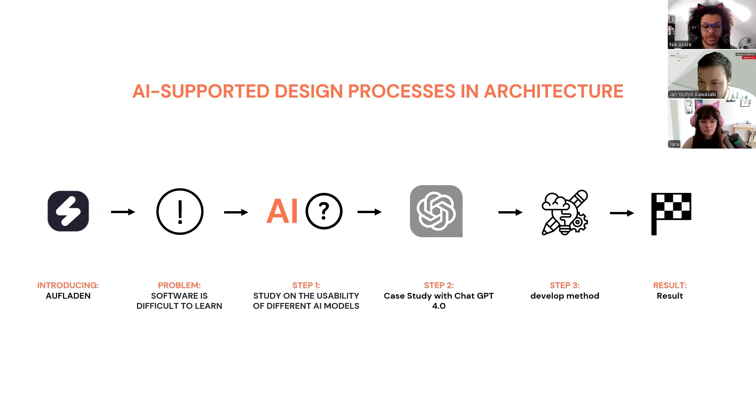In the research project Aufladen, which is funded by the Stiftung Innovation in der Hochschullehre, we are developing a digital teaching portal together with around 20 students. Aufladen is the knowledge-filling station where students have the opportunity to test and expand their knowledge in the context of digital transformation with so-called knowledge nuggets, through practical, playful application in the form of learning videos, tasks, click tutorials, and quizzes.

The research project offers space for various labs in which teachers can explore topics together with students through research-based learning and teaching. Aufladen offers labs on topics such as AI and the design process, parametric design, and AR technology. The lab areas of parametric design and AR technology are important for us today.

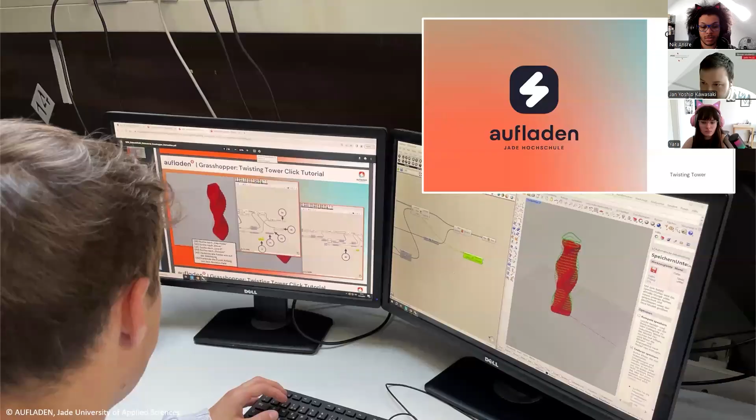Based on our research project, we have been able to create a course program where students have the opportunity to investigate building in combination with augmented reality and the feasibility behind it. Before the construction process, the object in question must be designed and modeled. The designs were parametric structures.

In the parametric design lab, it turned out that we were able to achieve the greatest learning success through prepared click tutorials. Nevertheless, a major problem emerged: the operation of the software is so complicated for beginners that they are severely restricted and cannot implement their ideas in the software. To create the designs geometrically, we use Rhino in conjunction with Grasshopper to then transfer the geometry to the AR glasses via the Fologram software.

Grasshopper is a visual programming interface and offers great possibilities for complex designs, but is associated with a steep learning curve. Students from our departments generally have no programming experience and often have no points of contact, and therefore little understanding of programming.

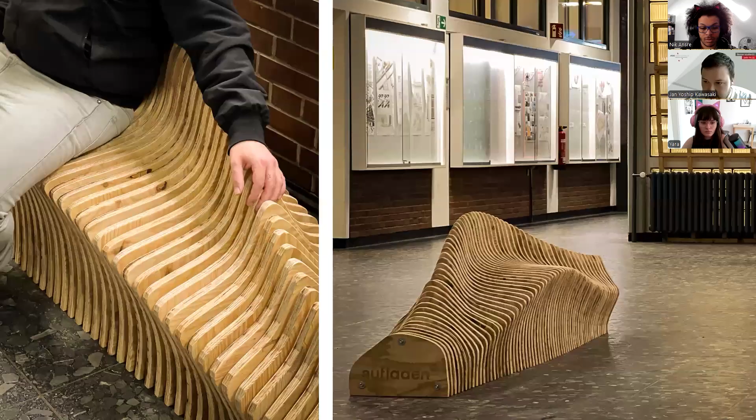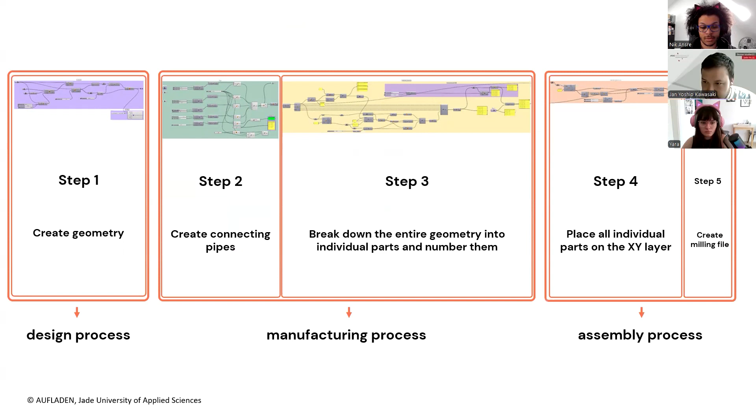Here we see a project from the last semester that we designed, planned, and built together with students. The bench is not overly complicated, but the code behind it is. This entire script is necessary for this rather simple bench. We cover different areas such as the design process, the manufacturing process, and the assembly process.

Due to the complexity of the software, we came up with the idea of whether we could let the AI take on the methodical knowledge about the software and include this step in our working process.

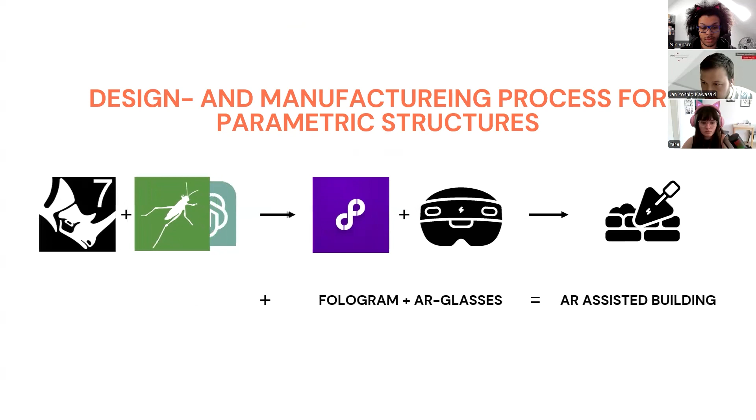Now we had to find a suitable AI for our approach. The main consideration was the workflow that the AI must be able to handle. Grasshopper offers the option of generating geometry via Python code. For us, this means that the AI must be able to translate our prompts into Python code. We can then easily read the output code into Grasshopper and check its function.

If the code is faulty or does not achieve the desired result, we can return the error message to the AI, and it can improve the code based on this. We can repeat this iterative process until the desired result is achieved.

We've developed an evaluation matrix to evaluate the various AI models. The requirements are divided into several points; we mentioned the three most important: Is the AI accessible in Germany? Can the AI understand and generate Python code? And can the AI use images to create shapes in Rhino with Python code?

We tested ChatGPT 3.5, ChatGPT 4, the Edge Copilot, as well as Gemini and Claude 3. ChatGPT 4 proved to be the most useful for application. The AI is slightly more powerful than the Edge Copilot and is not limited to 30 queries, allowing for the development of much more complex shapes over the course of a conversation. With unrestricted availability in Germany and the ability to understand and generate Python code, ChatGPT 4 proved to be the most useful for application. Additionally, it can use Grasshopper Python code to create geometric shapes and describe complex geometric forms.

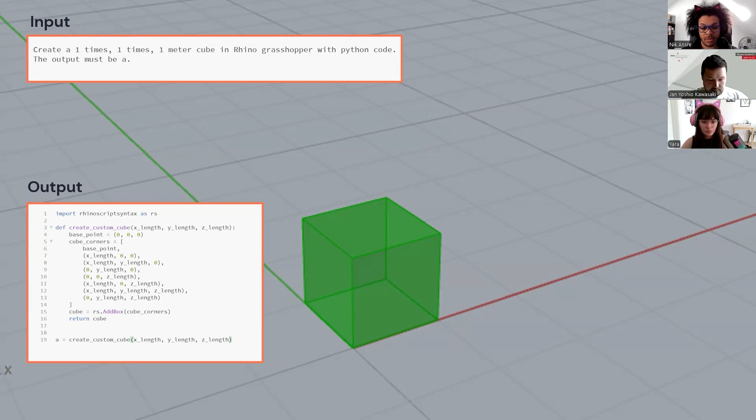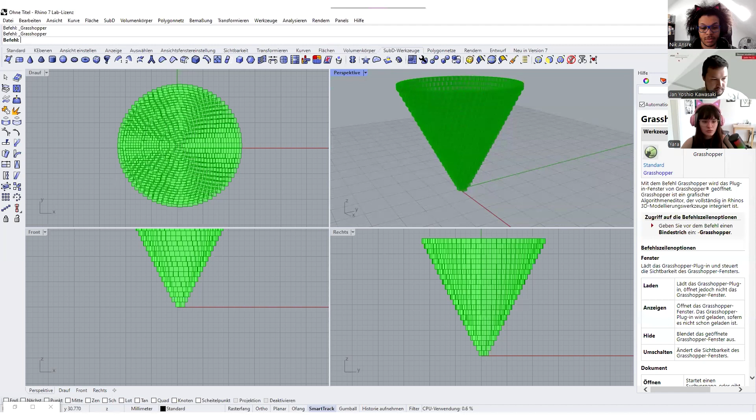A failure in generating more complex geometry with ChatGPT 4 occurred when it didn't quite understand how to build a vase. We then learned from these failures how to better define shapes.

After further discussions with ChatGPT, we could convey our idea of a vase, resulting in a better and more promising outcome on which we could build.

We then tried to generate a vase without a prior discussion. Without clear dimensions, this attempt was unsuccessful.

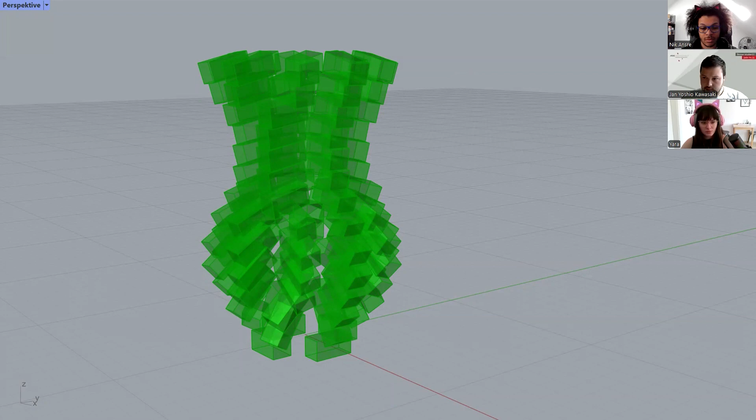In the process, we developed a method that ensures the AI produces consistent and reproducible results. We developed this method after failing to create a vase, opting for a simpler approach: the block structure.

Each of the two adjacent X's consists of a block, making it easier for the eye to recognize and for ChatGPT's image recognition to identify.

The method uses the X approach to eventually enable a reconstruction. The image shows a 2D view of a vase, and ChatGPT should generate the Python code based on the overall height, block dimensions, and respective width of the levels.

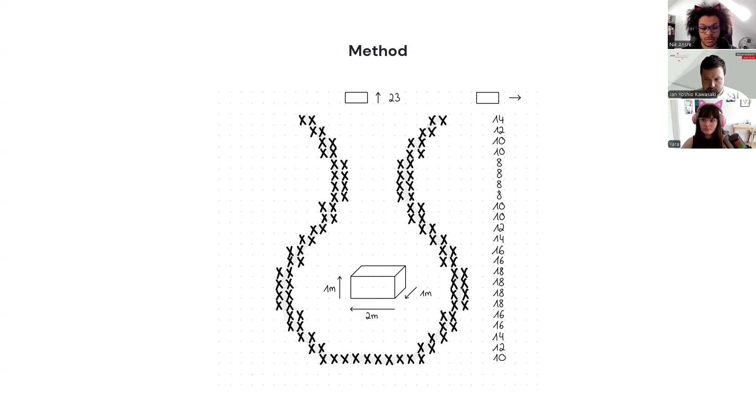This video shows the process of generating with ChatGPT 4. First, we provide the AI with a description of the vase with the appropriate dimensions. It then generates the corresponding code.

Due to the complexity of the request, it needs to refine and ensure the output is defined as A, which is standard naming in the GH Python scripting module in Grasshopper.

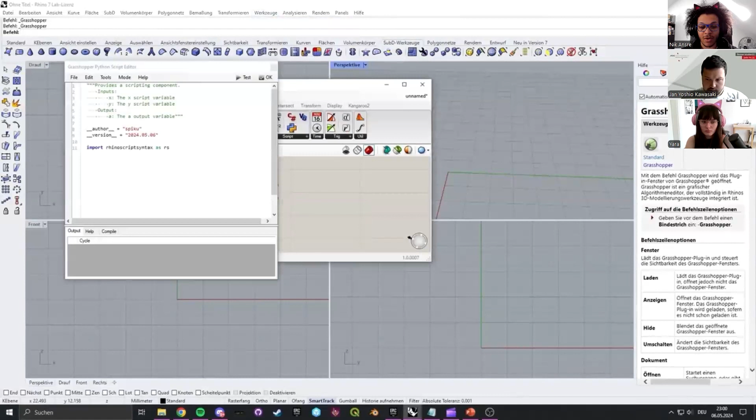Then Grasshopper is opened and the GH Python script module is inserted to input and test the code, with the results displayed in Rhino. Next, the Z variable is added as an input in the module.

The number sliders are connected to the three variables X, Y, and Z. The AI is instructed to adjust the code so the input variables can be modified via the sliders.

Again, the output needs to be redefined as A. Now the new input is the code in the Python module. The sliders can now be adjusted as the base shown in the video.

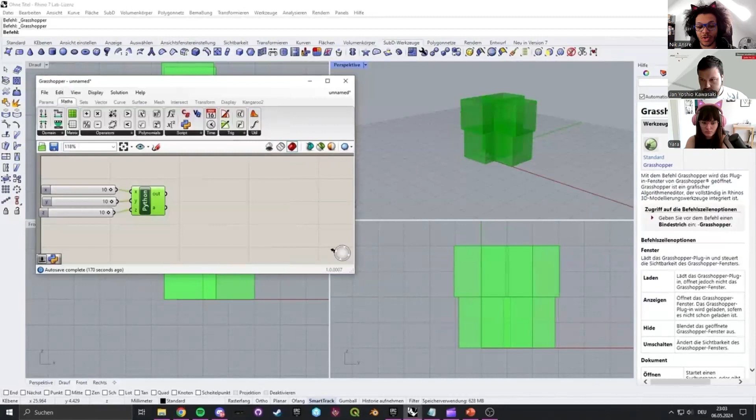ChatGPT provides information during the code generation process, including the libraries used, the function generated, and how to handle the code in Rhino and Grasshopper.

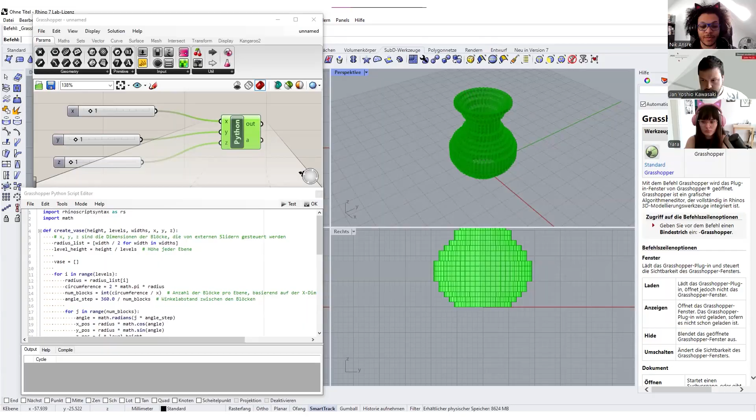The results of the videos can be seen here. As input, we instructed the AI to write Python code for Rhino Grasshopper to create a vase, providing the correct dimensions for the vase. In conclusion, we provide an outlook on the future steps.

Next, we will be presenting the research results on AI in design and manufacturing process in architecture at the University Future Festival 2024. There will be a digital collection of results for visitors to experience.

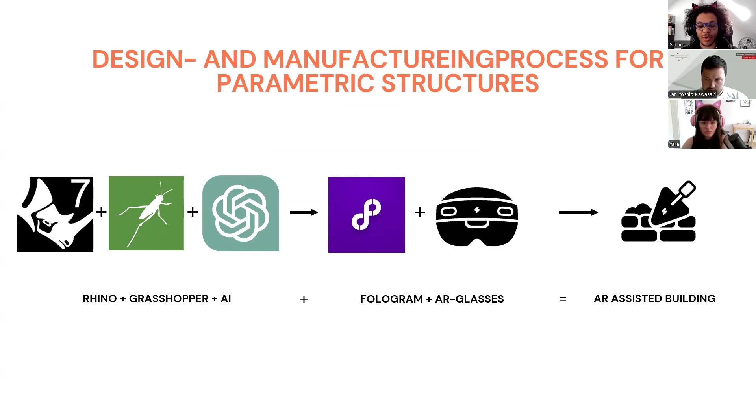Building on this article, we will next attempt to incorporate AI supporting not only the implementation, but also the preliminary design process and concept development. This would allow the technology to support every process stage.